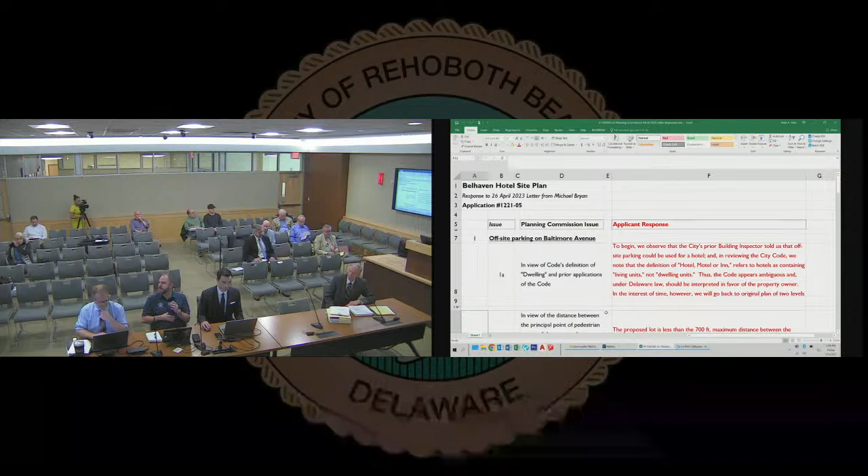Very excited to be here today to clarify and present the design in response to the comments that we've received. On the board here is a synopsis of the issues that were presented in the April 26th letter from Chairperson Bryan to Mr. Papajohn and Mr. Dukes. In particular, they're in order, we numbered them. So I'm just going to, some of these I'll read and some of them I won't, because some of them I have to read, some of them I don't.

In regards to the off-site parking on Baltimore Avenue, the comment was in view of the code's definition of dwelling and prior applications of the code. To begin with, we observed that the city's prior building inspector told the design team and the ownership team that the off-site parking could be used for a hotel. In reviewing the city code, we note that the definition of hotel, motel, or inn refers to hotels containing living units, not dwelling units. Thus the code appears ambiguous, and under Delaware law should be interpreted in favor of the property owner. However, in the interest of time, we will go back to the original plan, and we're going to provide all our parking on site, showing two levels of parking. Actually, it's a level and a half. Let me add that I'm going to go through these bullet points, and then I'm going to show you the drawings, so it'll be a complete presentation, and we can talk about it afterwards.

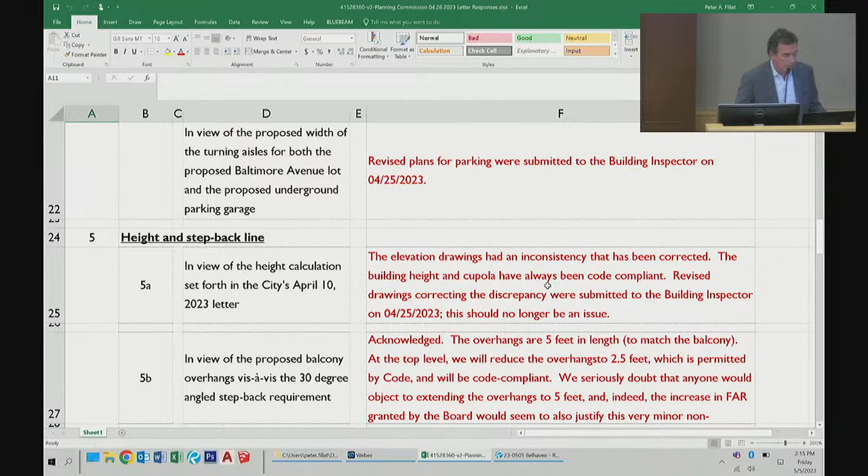In view of the proposed balcony overhangs vis-a-vis the 30-degree angled step-back requirement: the canopies are not buildings, and it was our hope that we would not have to include them in this step-back requirement. We would like to have a conversation about that, as it is not a written item in the code. However, if needed, the plans will show that along the boardwalk we plan to reduce the overhangs to 2.5 feet from 5 feet.

That will fall within the 30-degree requirement. Along Wilmington Avenue, we would take the awnings off if it's the prerogative of the building inspector and this commission. We'll show you what both of those options look like. You guys can decide. There is some level of ambiguity here, but if required, we'll do it. No problem.

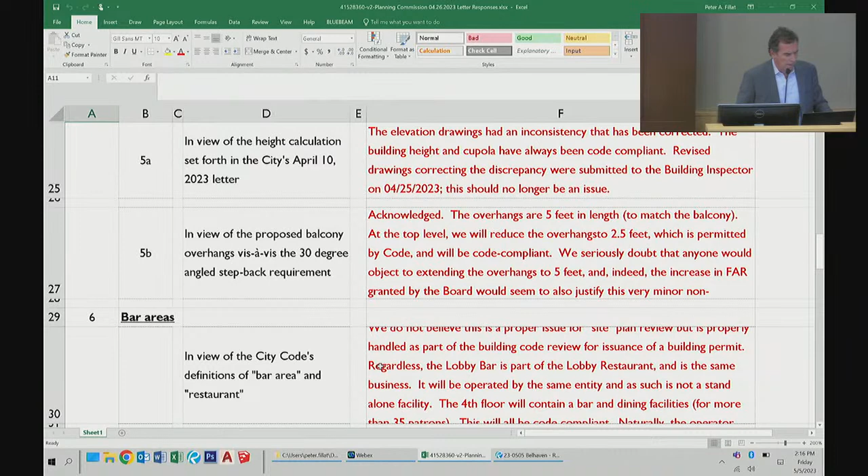Bar areas. In view of the city code's definition of bar area and restaurant, we do not believe this is a proper site plan review item, but is properly handled as part of the building code review, for instance, for issuance of the building permit.

Regardless, the lobby bar is part of the lobby restaurant and is the same business. It will be operated by the same entity, and as such, it is not a standalone facility. The fourth floor bar will serve food and has a greater seating capacity than 35 people.

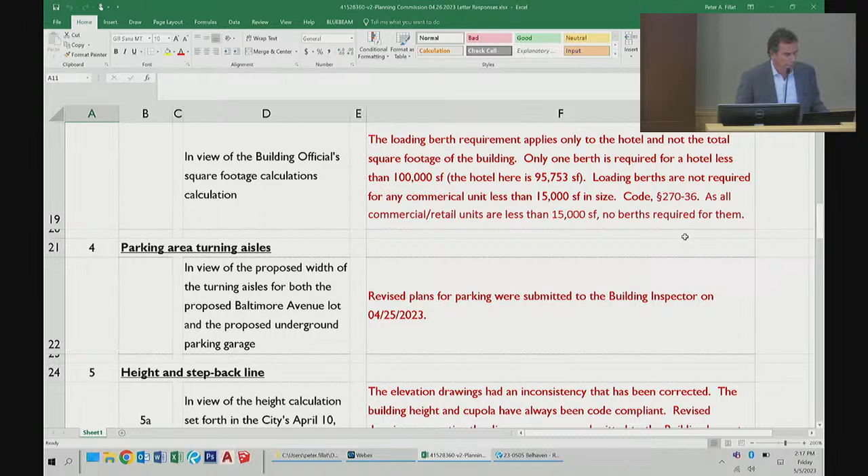Lot coverage: whether the applicant contends that the applicable restrictions under City Code 270-21C with regard to the ground level of the proposed building structure is 50% of the lot area and 100% of the net lot area, or some other calculation, and in each instance, the basis of the applicant's contention.

The building is a commercial mixed-use building containing retail shops and a full-service luxury hotel. The allowable lot area coverage is 100% for commercial use, and the hotel portion is less than 50% coverage. The square footage of the ground floor of the hotel is less than 50%, so this complies.

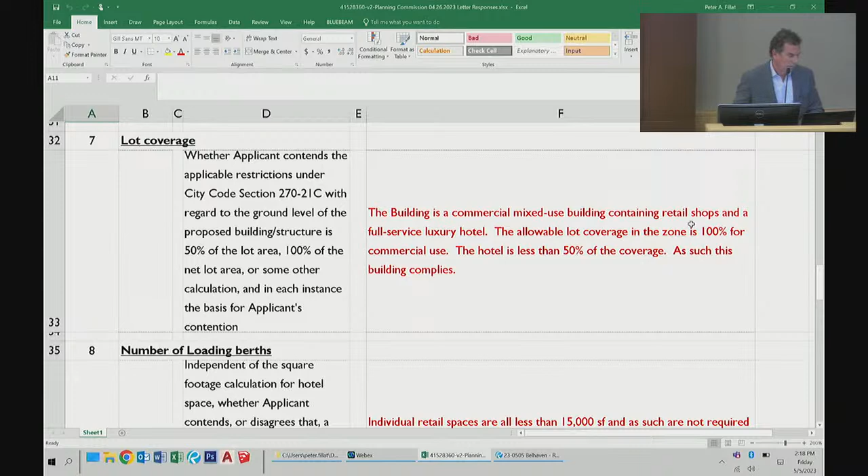Number of loading berths, independent of the square footage calculation for hotel space: whether the applicant contends or disagrees that a loading berth is required solely based on the square footage of the proposed retail space on the ground level. Retail spaces are less than 15,000 square feet, and as such are not required to have loading bays.

Coastal building line. Am I skipping anything? I know I'm bouncing around. I apologize, it's a little squirrely.

Coastal building line: does the applicant intend to obtain a letter of approval from DNREC Shoreline and Waterway Management Section, and if so, when? Yes, the applicant will comply with all other applicable legal requirements.

Cupola. What is the intended use and purpose of the proposed cupola? The cupola is a decorative feature meant to recall the iconic green hip roof of the historic Belhaven Hotel, which was located on this site from 1898 to 1964. It is, in a way, one of the defining elements of this design, and it's something we feel very proud to be a part of and proposing in this solution. It is a nod to a sense of continuity in the Rehoboth landscape.

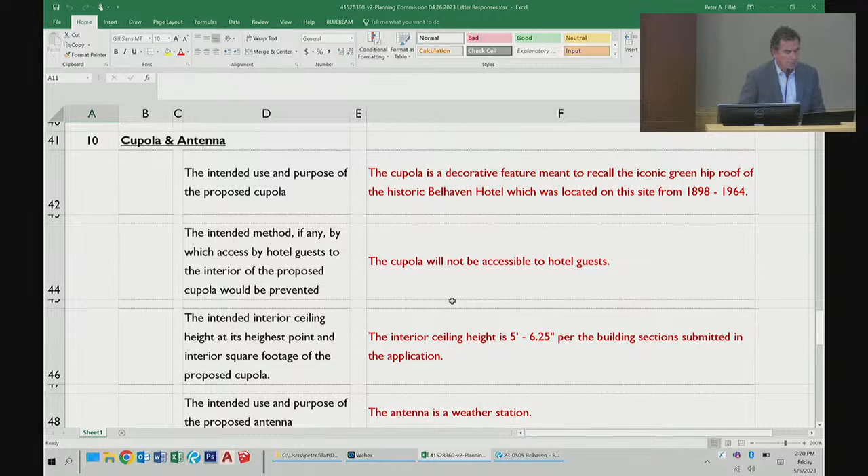The intended use and purpose of the proposed antenna: the antenna is a weather station.

Lot consolidation. When does the applicant intend to formally consolidate the various lots of the code? Lot consolidation will occur concurrently with the final site plan approval.

ADA compliance. There were comments on the ADA space locations in regards to where the elevators are, in view of the distance of the proposed spaces number 6, 7, 11, and 12 from the proposed elevator bank in the proposed underground parking garage. These spaces, we've redesigned the garage, and we'll show you that in a minute. It's per the plans that were submitted 4-25-23 to the building inspector.

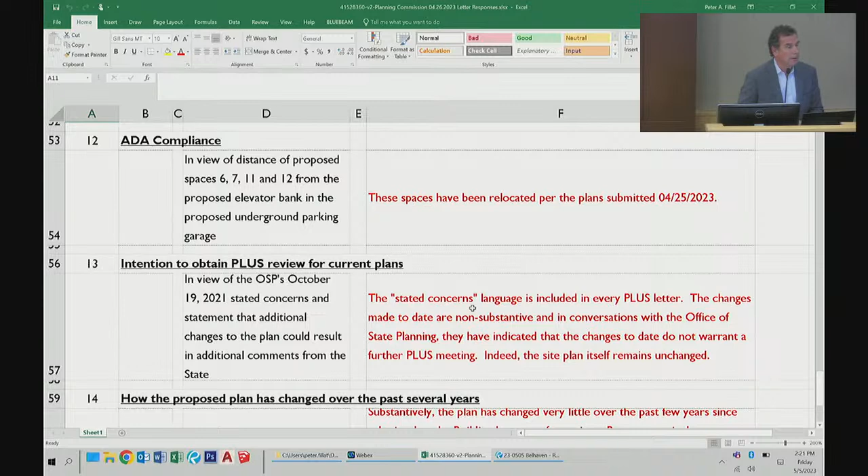The intention to obtain PLUS review for current plans. The comment is, in view of the Office of State Planning's October 19th, 2021 stated concerns and statement that additional changes to the plan could result in additional comments from the state. The quote-unquote 'stated concerns' language is included in every PLUS letter. The changes made to date are non-substantive, and in conversations with the Office of State Planning, they've indicated that the changes to date do not warrant a further PLUS meeting. Indeed, the site plan itself remains unchanged.

And then lastly, how the proposed plan has changed over the past several years. Substantively, the plan has not changed very much since the building was originally submitted in 2019. The room count is the same. Commercial and retail space is virtually the same. The only real change is that the second level pool, when originally presented, was along Wilmington Avenue. We moved that pool to the middle of the building where there's a courtyard, and we've moved the guest rooms to the south wall.

So now I'd like to just go through the drawings, which is always more fun.

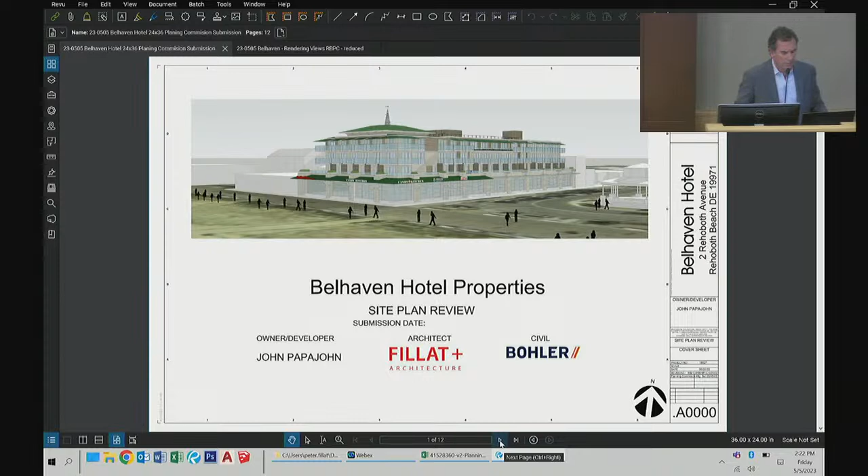This set of drawings has been revised to acknowledge today's date, so it's dated 5/5. This supersedes all the other stuff that we just recently submitted. Yeah, this is it, right?

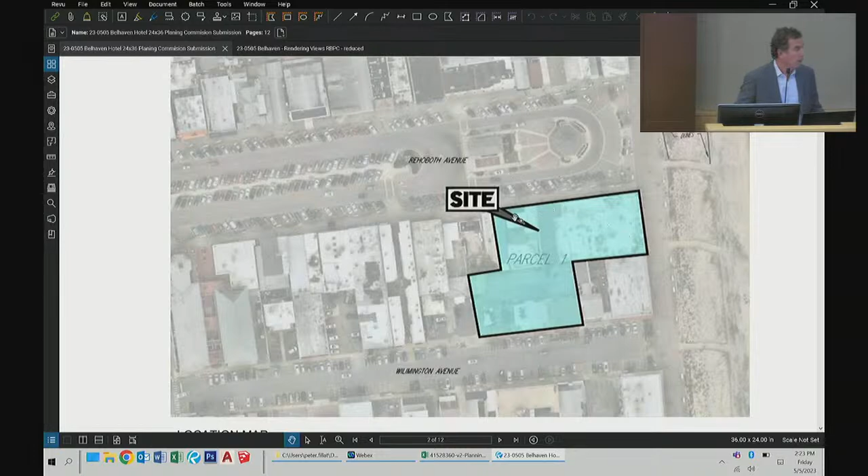So you'll see on this plan in particular, in this drawing right here, there is no location of the Baltimore Avenue lot. This is the site, the entire site. And in this plan, we also respond to various aspects of the points that were discussed earlier.

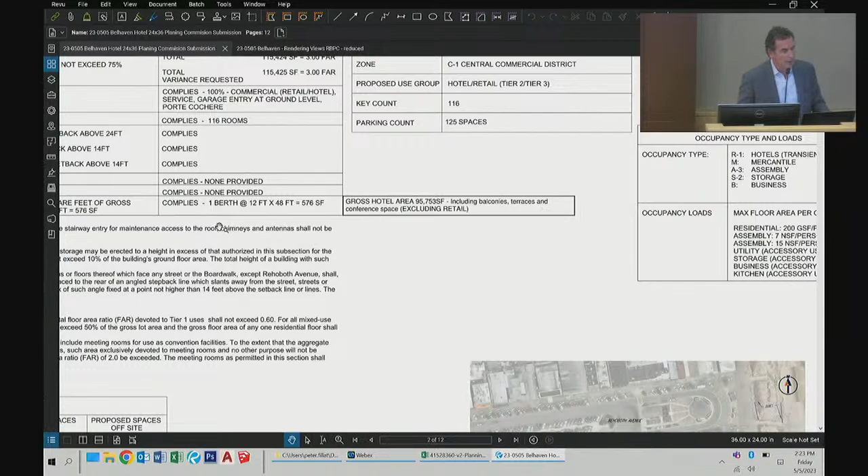The gross area of the hotel is 95,753 square feet, including balconies, terrace, and conference space, excluding the retail. The requirement there is 1 berth for loading. In terms of the parking requirement, it's the same at 121 spaces, but there will be a Belhaven garage underground. It'll all be there, 125 spaces.

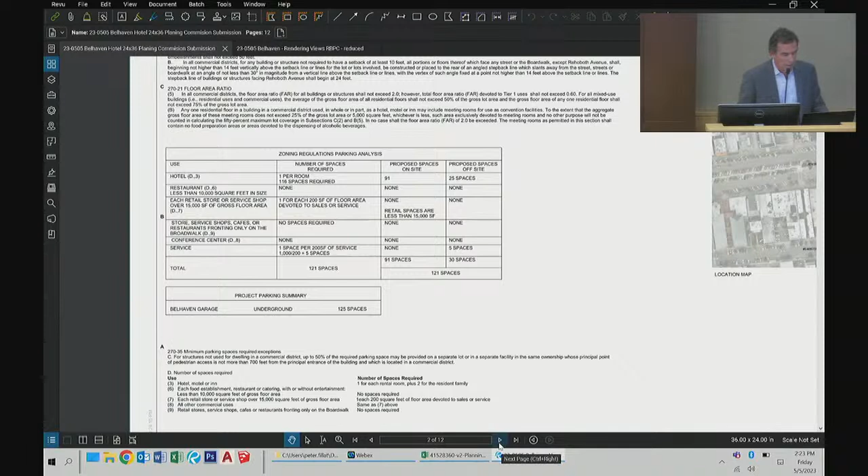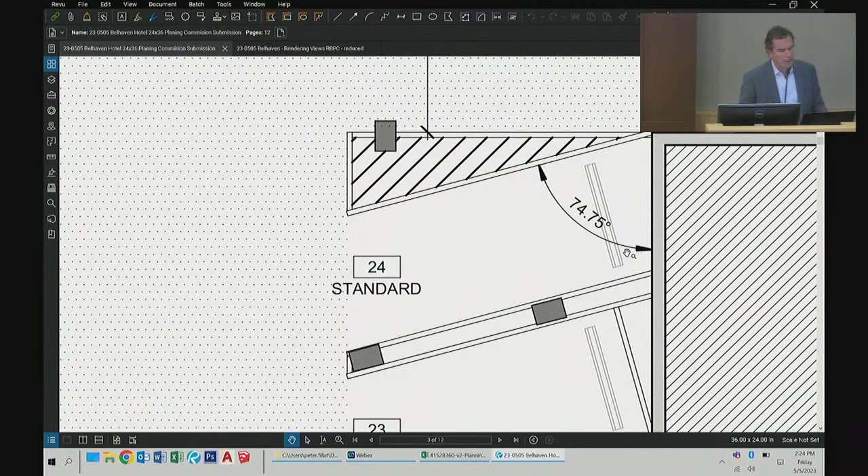So I'm going to go through the drawings here - this is fairly technical, but if you look here, all of the drive aisles form a one-way system with a 20-foot wide drive aisle, and the parking spaces are 74.75 degree spaces.

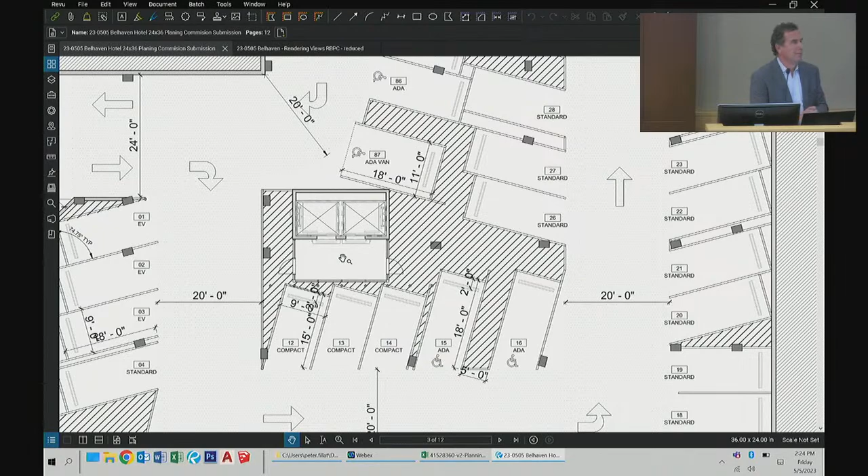In particular, in response to the comments regarding the ADA spaces, these are the ADA spaces here, the ADA van spaces there, another ADA space there, all of which are connected to the lobby of the hotel. We want to get this thing done, so we're responding positively to the comments that were received. This also shows that the ramp comes down here.

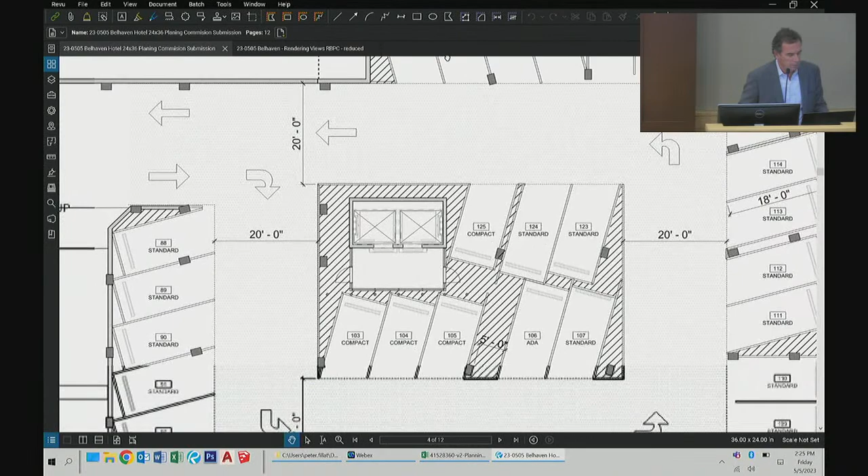The ramp continues down to the lower level of parking, which contains - let's see how many spaces it says - I think it's 25 spaces below grade, but I'm sorry, it's actually 35 spaces below grade. We are now at 125 total, and the requirement is 121, so we have 4 extra spaces.

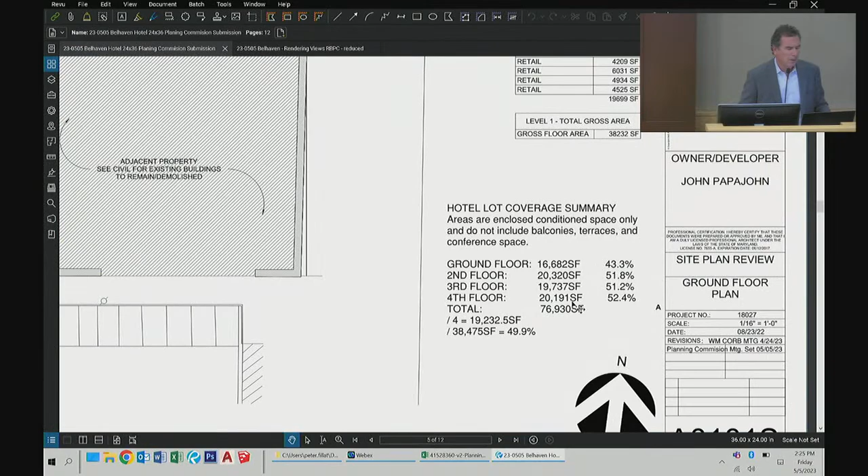There's really no major change to this. Again, we still have only one loading dock. Everything about this plan is pretty much the same. There's an area summary here that addresses some of the issues of lot coverage, even though we've kind of covered them already, but they're just there for reference.

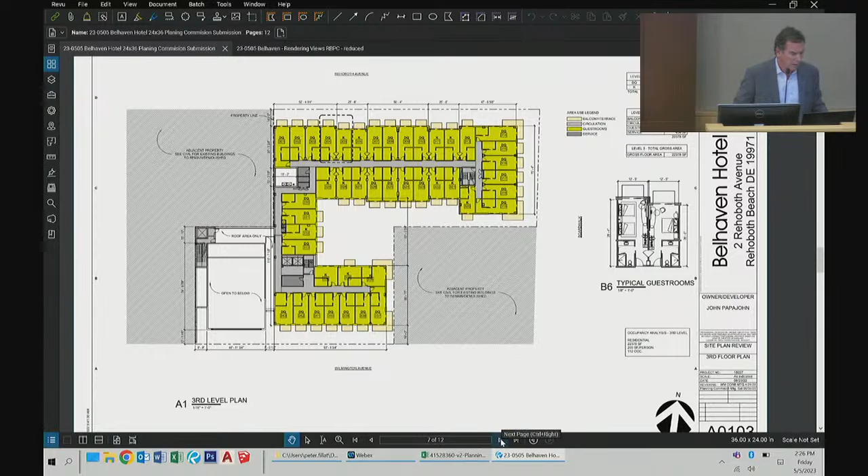No substantial change to the third level plan. The only change on the fourth level plan is that because of the setback requirement along Wilmington Avenue, these balconies along Wilmington will be 3.5 feet deep as opposed to 5 feet deep.

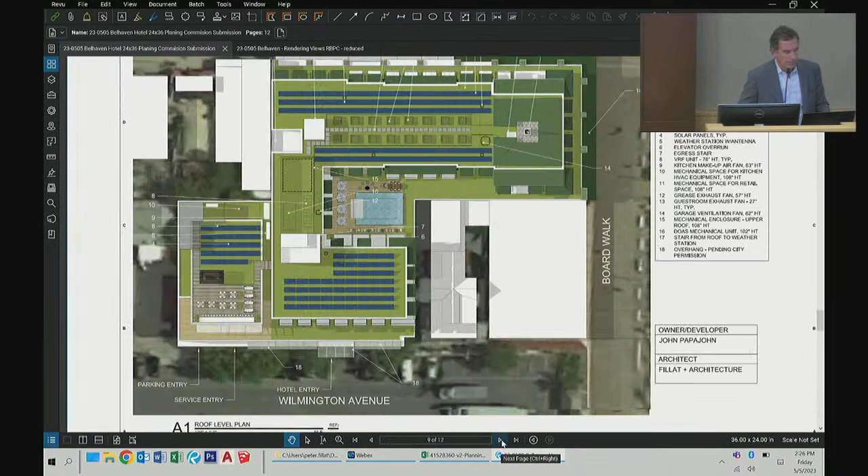Building is similar, roof is very similar, okay? So in particular, this is the kind of thing I want to talk about, and I'm hoping that my fellow architect will be able to help me here.

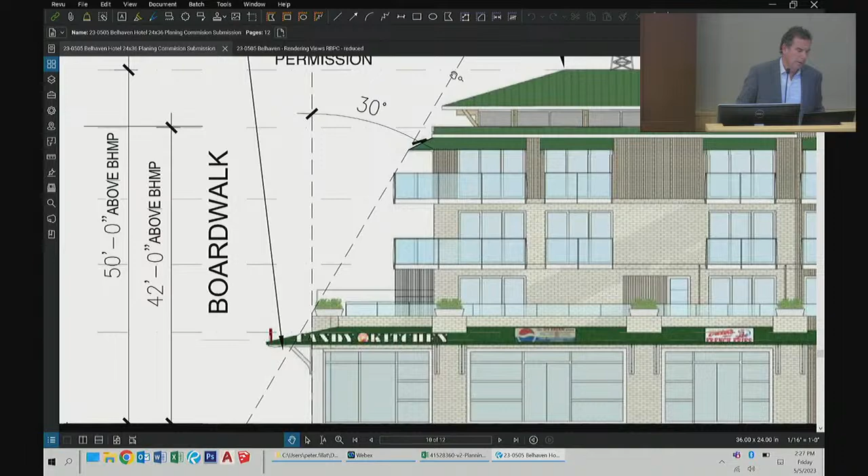What we've done here is we've really just shortened this portion of the awning to stay within the 30-degree setback here. Everything else on this elevation complies.

We also have changed the note so that it says 50 feet above the BHMP, which is the building height measuring point, so there's no question as to what's 50 feet and what's not.

Building height measuring point is elevation 13.42. The ground floor of the building is elevation 13. I'm sorry, what was that number? Elevation 13.

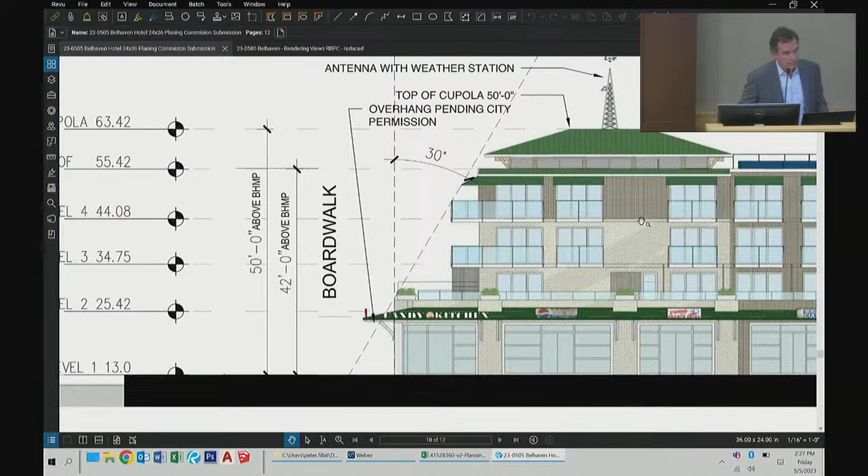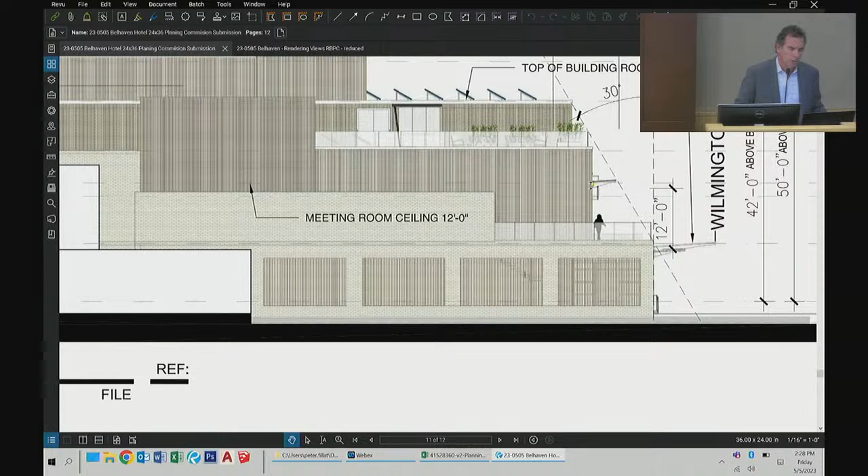No major change to this elevation. This is really the elevation that shows where we have lowered the awning canopy in front of the ballroom, so it's a little shorter. We've eliminated the canopy facing Wilmington Avenue.

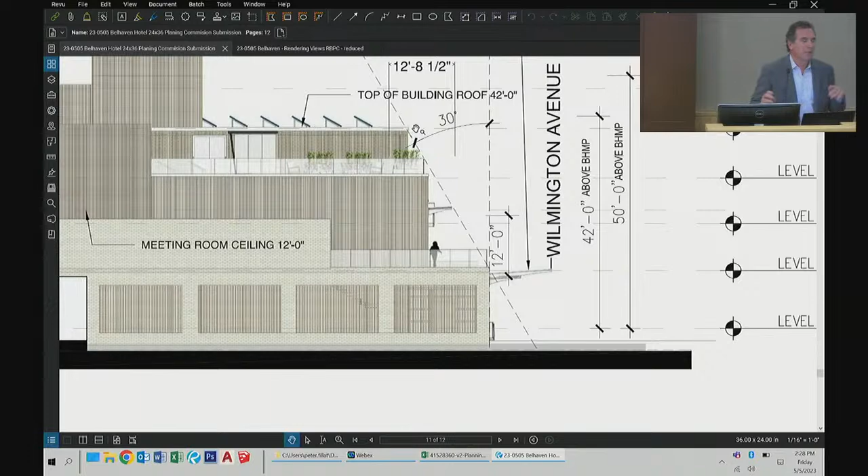This awning is also an important part of the sustainability goals of the project. One of the best things about this building when we modeled it was that all of the windows were covered by either a balcony or an awning. If we have to live with this somewhat ambiguous requirement, we'll lose that coverage on this side, the south side of the building, unfortunately, as life would go. That's why we want to talk about it here today, because perhaps there's an opportunity to find another way. We're not going to reduce the size of the building, and everything else stays the same.

So here again, you can see it. This is the same section that shows the 30-degree setback. This is actually the other side. Wilmington Avenue is on the right here, and the building is looking to the west, as opposed to the elevation which was looking to the east.

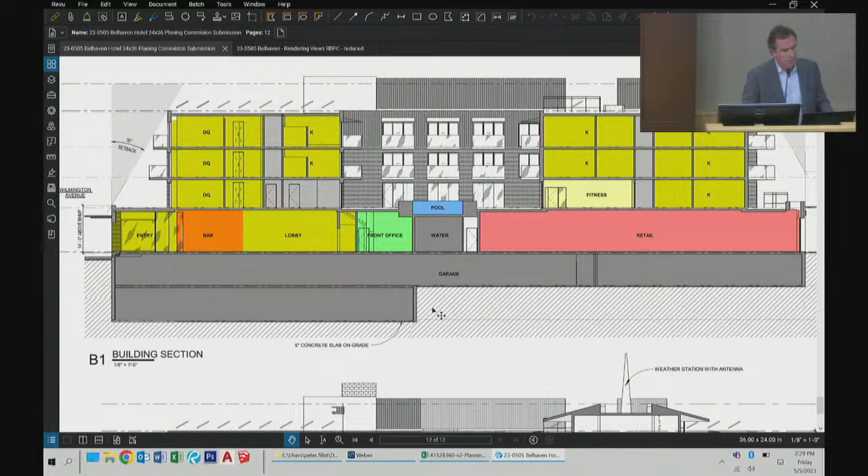This also shows you how the second level of parking works, a partial level, as you can see here. So that's the design. On the other side, you can see the full 5-foot awnings fall within the 30-degree setback. We like the aesthetic of it, and we also like the energy savings aspects of it.

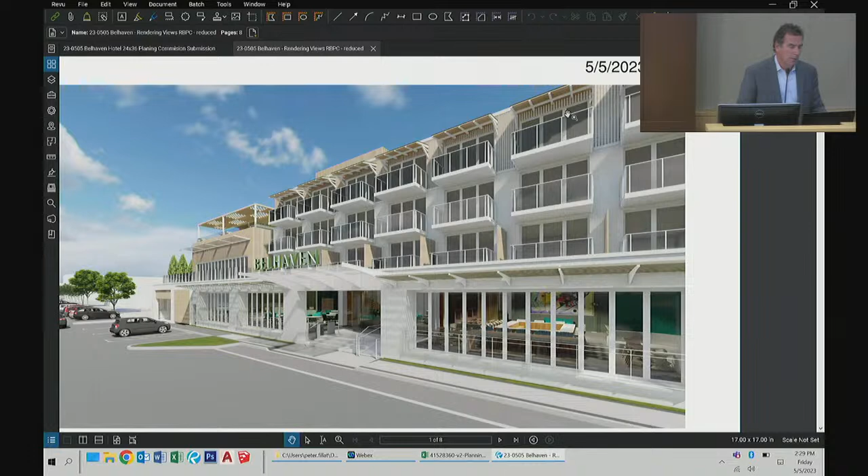Lastly, I would be remiss not to really plead my case here. This is the design as we presented last month with the awnings facing south. These really add character. And this is what the building will look like without those items. It's just a stark contrast between one and the other.

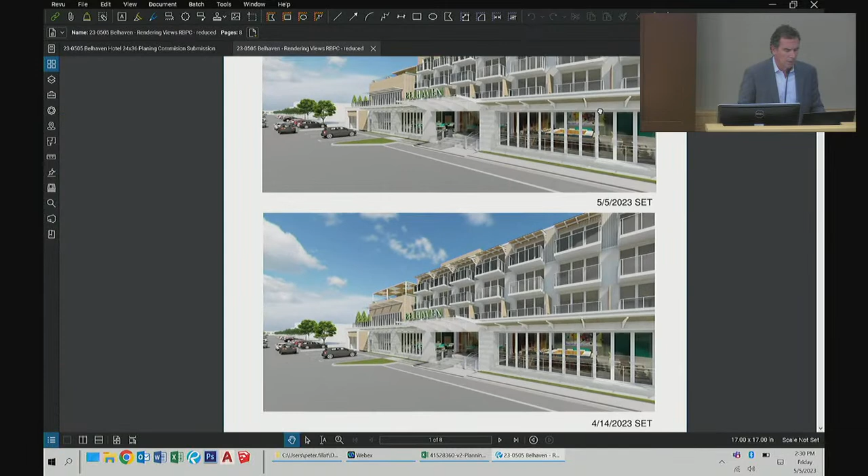It's easy to see on this elevation the most. I'll show you the rest of it, so you'll say it doesn't make a difference over there, but it does make a difference here.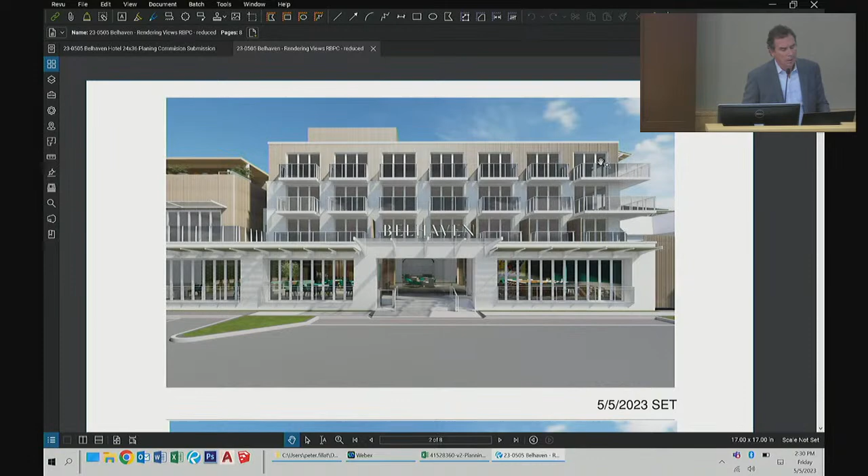So here, this is the south elevation. Again, the awnings and the canopy over the rooftop bar cafe. And this is what it would look like without it. You can sort of see it's a little more barren looking, and obviously the heat gain would be substantially greater on these upper level units than they would be here. As a matter of fact, you can see the shadows here, how beautiful that is, versus not there.

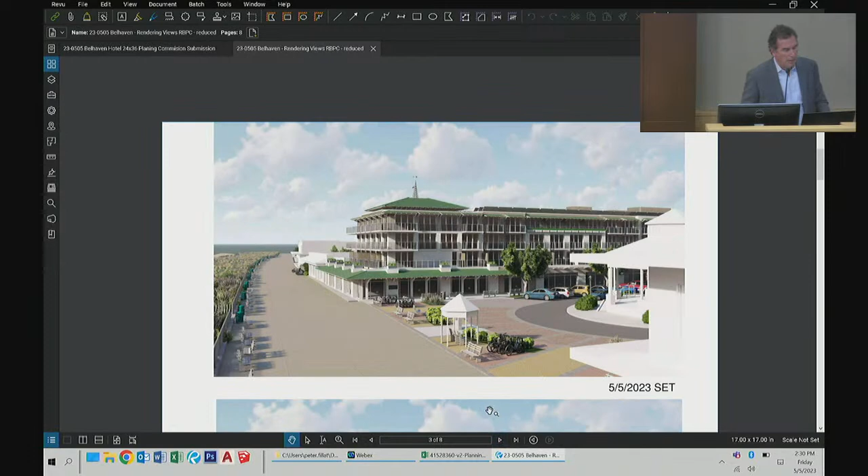On the other sides of the building, it's not quite as apparent. We are going to still keep these because we think it's a defining character. This is the 2.5-foot awning here, and this is the 5-foot awning there. Not quite as elegant, not quite as interesting, but it's still something we would like to keep, and we'll be able to keep.

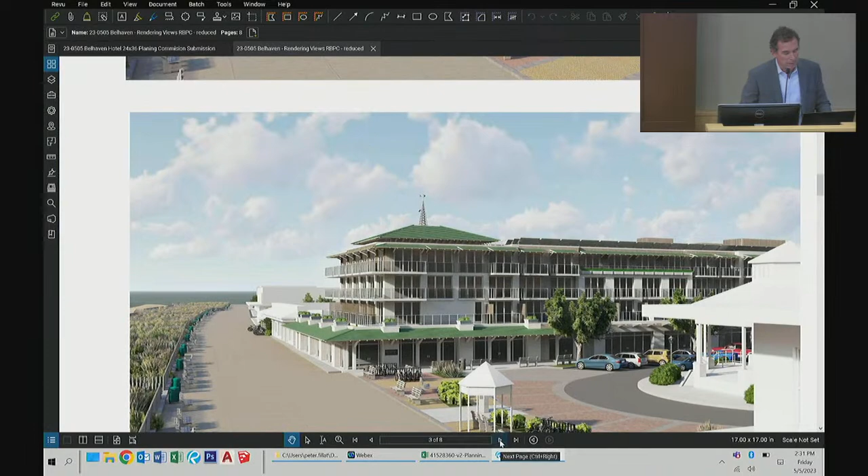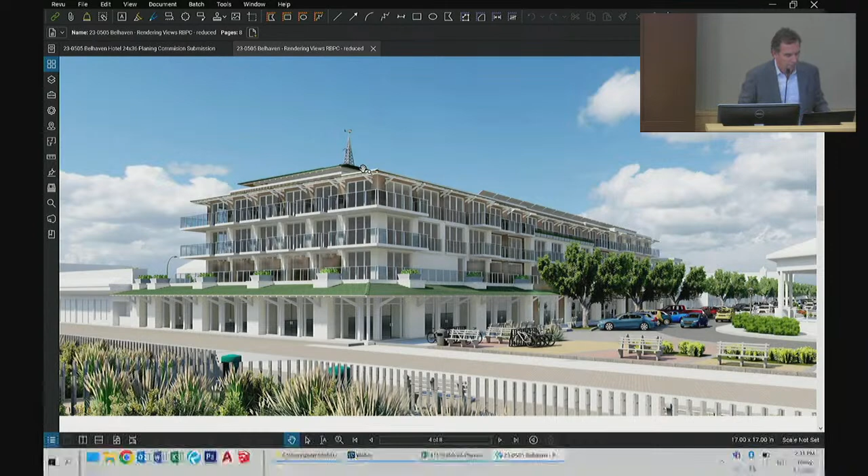This is another one, the full 5-foot awning along the boardwalk, and you can see it's sort of consistent down the entire building. And then here it is, a little different. Like I said, my colleague the architect will be able to have a stronger sense of this than perhaps most lay people.

Okay, here's a view from the top. This is the shorter awning. This is the larger awning.

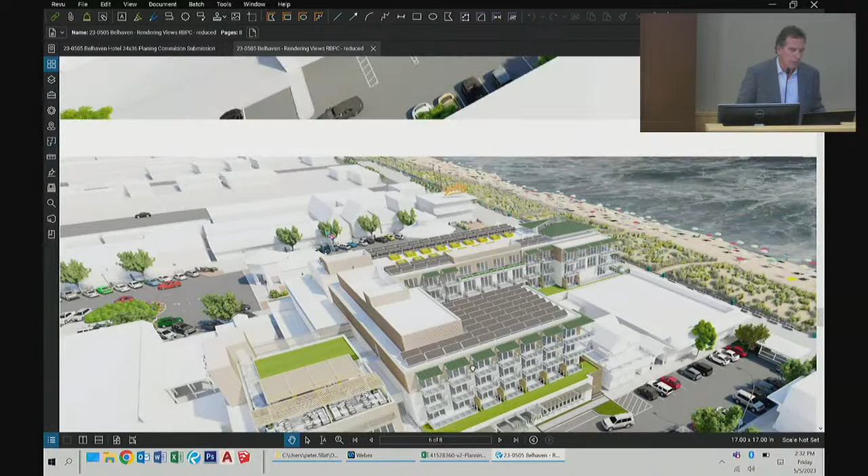This is a view as presented at last month's hearing, with the awnings facing the south elevation and the shade device over the rooftop bar cafe. And here's what it would look like if it had to be eliminated.

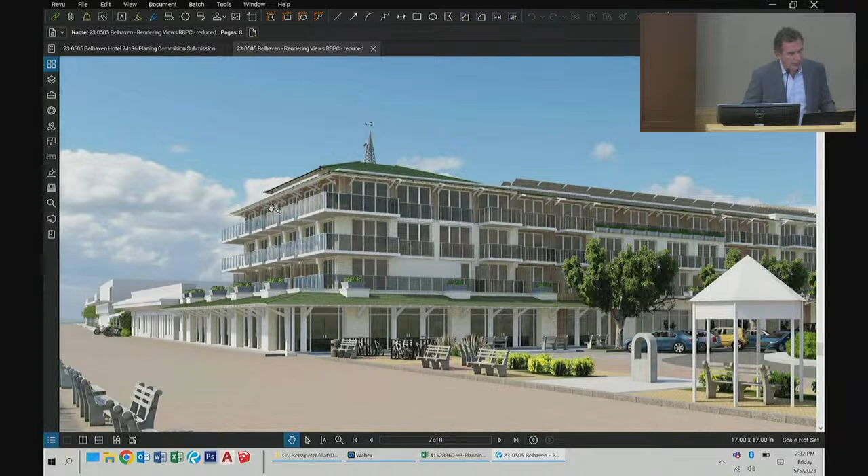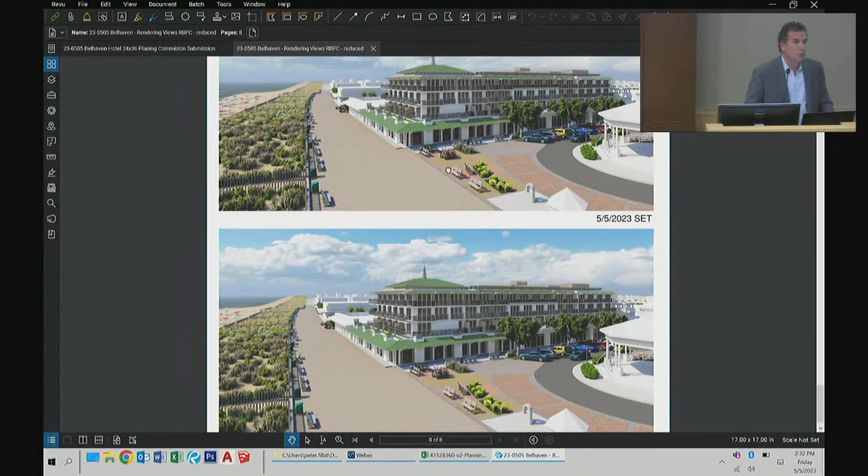Again, a couple more beautiful views of our project, which we're super excited about. This is the 2.5-foot awning along the water's edge, and this is the more proportionally elegant solution with the 5-foot awning. And lastly, this is the 2.5-foot awning. So that concludes my presentation, and I'm happy to answer any questions and follow up with any conversations you'd like to have.

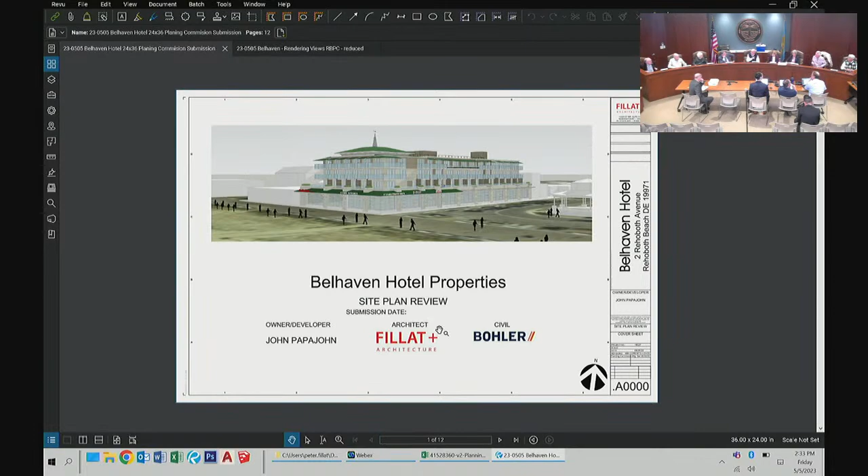If I may interrupt, sir. I'd like to go back to the building inspector for just a moment. Nick, in view of what has been discussed here today about putting a second, partial underground parking floor, maybe Strawn Environmental, the sub-consultant, should be advised of that before they put more work into a building that only has one floor underground, and before they issue their report. Did you ask that to the building inspector? I'm asking that to him, because he's in touch with the sub-consultant. I'm sorry, the planner, sorry. Thank you, the planner.

Yes, so the consultant would absolutely like to have this additional information. However, I think we're still going to be looking for a level of detail regarding the flood-proofing design elements they propose, as well as discussion and analysis of the hydrostatic forces. In review of the previous geotechnical report, which we appreciate you providing, it does not address the actual analysis of the subsurface water forces at play here. It mentions them in passing, but does not say more than that. So it gives us a starting point, but we can't make any definitive analysis until we have the whole of the information available to us.

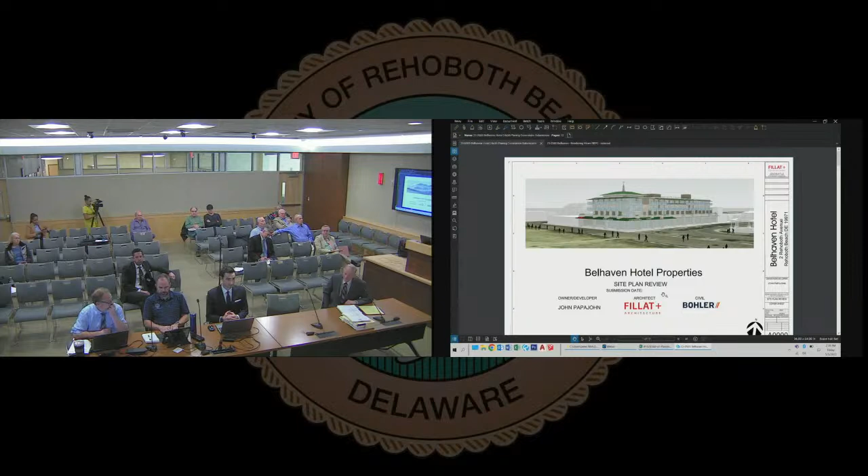Very good, thank you. Mr. Fillat, anything else? No, thank you. Members of the commission? Mr. Strange? Couple of simple questions. Speak into your microphone. Oh, I'm sorry.

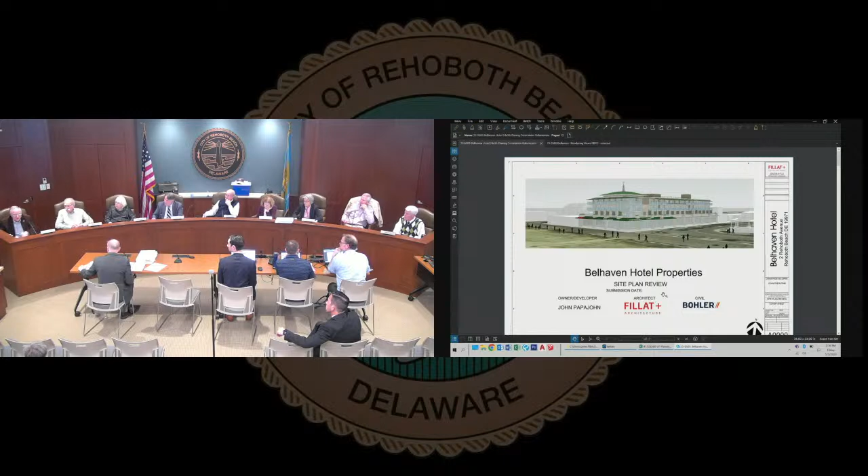Precisely. The other is just a question. In the documents you provided, there was a reference to an alternative design approved on 4/17/2023 by the State Fire Marshal. There was nothing in your packet that included what that is, I guess is what I'm asking. Is that this, is it this design? Yes. Okay, so we're going to be getting that with engineering size drawings eventually. This design here? Well, yeah. Yes, okay, sure, and that's the one this is referring to, that was submitted to them. Correct. Okay.

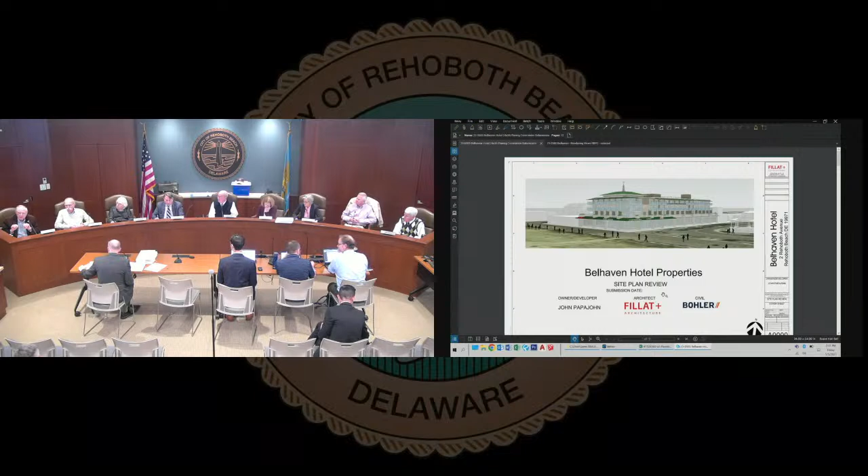Forgive me, I'm not sure I'm being clear even for myself. That design as such was approved by the state fire marshal, and therefore his comments or recommendations are in a report that will be available to us, or was that even available to you yet? I believe we got a letter from him. We didn't get a report. So we got a letter that said this is approved as per the communications and submission. Okay, because in a state fire marshal's approval, somewhere in there will be statements such as the maximum capacity of the building is X, and the maximum capacity of particular rooms are Y. I can show you the state fire marshal letter if you'd like to see it. Well, eventually it needs to be part of the record, so I'm asking, because it wasn't in the original package, and that's one of the things needed to do our due diligence when we finally move to the next phase. So that was that.

Well, since the Baltimore Street issue is off, I have no further questions with regard to that. And I guess what I would say is now with this new information, which thank you for providing it today, we'll need either D or E size drawings that you had before so we can actually see them and make determinations of what it is. Appreciate it. Thank you.

Yes, sir. Ms. Gay? Yeah, I have a couple questions about lot coverage. Thank you for the presentation, that was very helpful. And I saw on the materials we did get that you had recalculated the lot coverage for every floor. I guess I just wonder what the recalculation consists of, since you're now maintaining it does meet the requirement for 50%. That is what you're maintaining, right? That you recalculated the numbers from what we had before, but I couldn't tell what was included and not included in that recalculation. For example, the first floor, you now have as 16,682, when by my calculations is 18,534. I just couldn't tell what was left out.

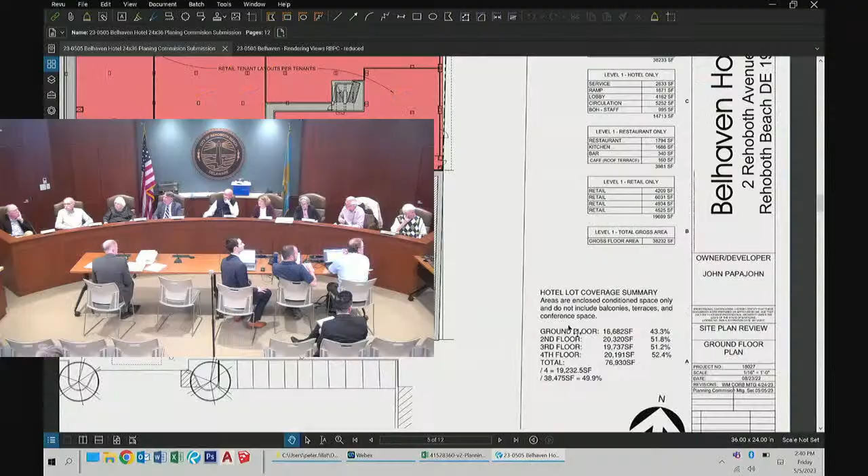Yeah, so in this diagram here, it says hotel lot coverage summary. Yep, I'm looking at that. Areas are enclosed conditioned space only and do not include balconies, terraces, and conference space. So in these numbers here, the total that is 76,930, they do not include the balconies, terraces, and conference. So you maintain that lot coverage does not include a balcony? So if it were per the previous code, it would not be included. So, and irrespective of this, the variance allows for greater lot coverage.

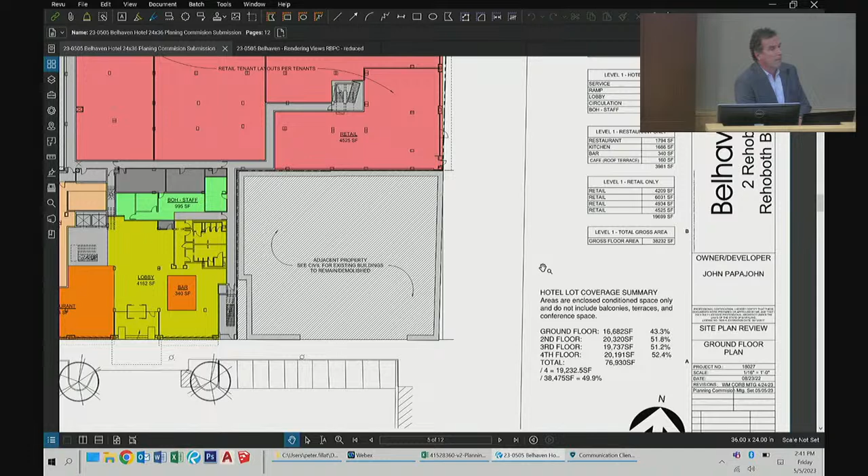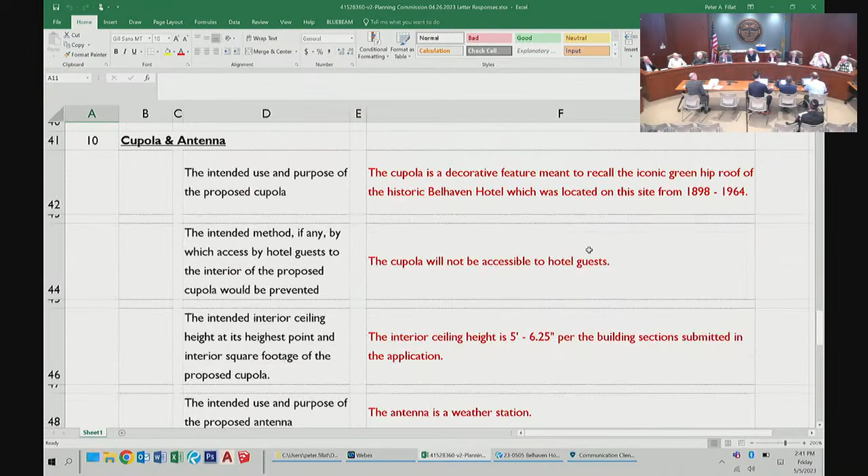Well, by its, I saw that you were making both arguments, but I also saw that you redid the calculations to meet the 50% requirement. So I guess what I was trying to demonstrate to the building inspector is that there could be a dialogue here that would bridge this gap, even though it's not necessary. Okay. And you didn't seek lot coverage variance when you got the FAR variance, is that correct? You did? Yes, we did. We did. So you specifically sought a variance from 270 - Matt, help me out with the number - the part that covers hotel lot coverage is a separate code feature from the FAR feature. You sought a variance for both of those codes? Yes, we did. Okay, I'll look at that. Okay, thank you.

Okay, Susan Stewart, do you have any issues? I have a question with regard to loading berth. Yep, and it's similar to Susan's. You're saying that the hotel area is 95,753. Right. If I take your total square footage and subtract that out, I get 19,000 something. What are the elements that are in that, the difference between 115,000 and change and 95,000 and change?

The retail space. The retail space. So when you say that you don't need a loading berth for the retail space because it's less than 15,000 square feet, how do you reconcile that? Because each of the retail spaces are less than 15,000 square feet. Okay, because the code talks about uses, not spaces. So your position is that each shop is its own retail space? Yeah.

And if you had to put in another loading berth, where would it go? Next to the one that's on Wilmington Avenue. Okay. Mr. Fillat, can you get your microphone closer? I'm sorry, next to the one that's on Wilmington Avenue.

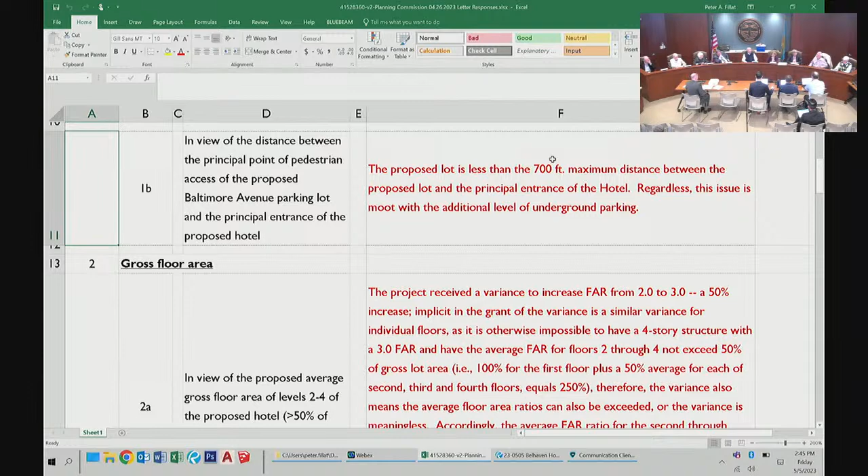Mr. Chairman, if I may, since we're here and it's in people's mind, my name is Richard Forston, one of the attorneys for the applicant. I tabbed that provision about loading berths because I anticipated it might become an issue.

The code says a retail or service establishment or other commercial use with over 15,000 square feet of gross floor area requires a loading berth. In other words, if I've got a store and it's 15,000 square feet or more, I need a loading berth according to your code. But if I have a series of 2,000, 3,000, 4,000 square foot commercial uses that are all separate in a row, like the boardwalk, I don't need a loading berth. And by the way, where would I put it? Ideally a loading berth goes for a particular store, so I'd have one loading berth for what, the 4,000 square foot store, and the rest wouldn't have them. It doesn't make sense. And in fact, that's why your code uses the singular and says a retail establishment greater than 15,000 square feet needs a loading berth.

It's a such and such a size, you're going to need a loading berth because you have a lot of deliveries. But if you're a small store or a series of small stores, you don't need a loading berth. So that, we cited that, it's 270-36. We're going to follow up, and I know this is new to you, but as you can imagine, we've spent the last 2 or 3 weeks going through all the comments we had gotten from you previously.

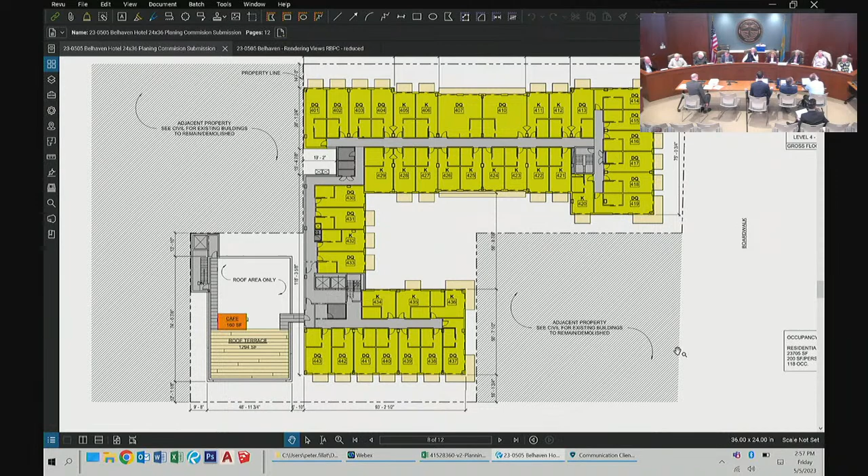The restrooms are located here, connected via a bridge. So those are public restrooms right there? Yes, they are. Didn't know that, I just — public restrooms right there. I doubt this would satisfy what you've had there, which is just simply a bar, pretty much self-standing.

I'm sorry, but to me, I don't see how this works and meets the code. It does work. It can work. It will work. Well, I don't see it. Can we go to the first floor?

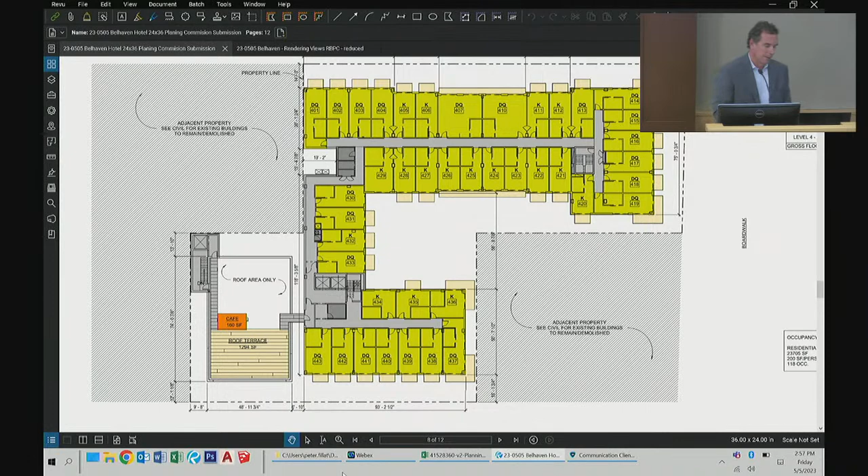This also has not changed, at least since the August plans last year. I realize what you're trying to indicate — you have a restaurant, a separate bar, and the lobby, and you say that's all one combined space, therefore it meets code. But if you really look carefully at what the code requires, at the very least the bar has to be part of the restaurant, and I believe you'd have to have a separate entrance to the hotel reception area. So once again, I don't personally see that this meets the code.

So the code does not say the bar has to be contiguous? What you're really saying is the bar needs to be contiguous to the restaurant, and if the orange square in the middle of the yellow were touching the orange where the restaurant is, presumably you'd be fine with it. What's troubling you is that it's not contiguous to each other — if I can drill down to the nub of your concern. Well, the code says the bar area has to be within or in the restaurant. All right, but if I say that bar area is part of the restaurant and people are going to eat food there as well, is it in the restaurant or not? It's not contiguous, right? So that's your point, right?

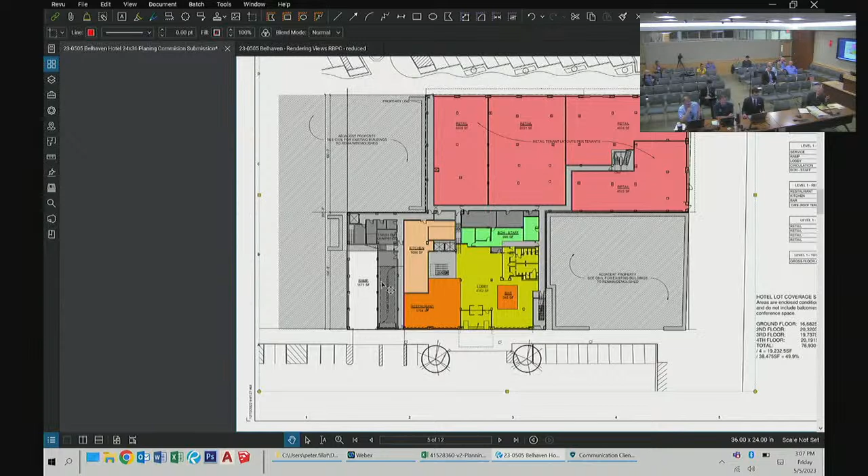I have a question about something I didn't notice until now. With all the focus on loading berths, I happened to look behind it to see that trash room and dumpster. I've always wondered how that's going to be accessed if it's inside. But I now see it's separated from the loading berth by what appear to be stairs and a ramp.

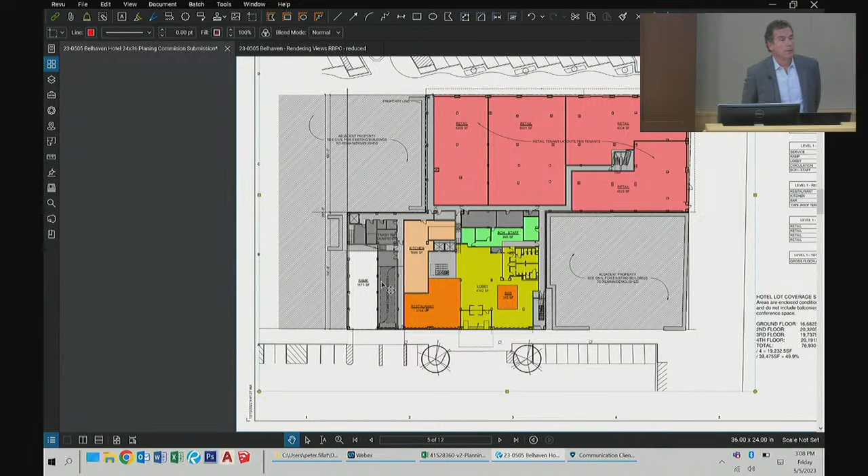So it'll either be rolled out, or a truck will go in there and get it. It would be able to be accessible. This is not an unusual situation—it's a refrigerated room so the trash doesn't smell in the summertime, and it's got a drain in it, so it's easily cleaned. This is a first-class organization here.

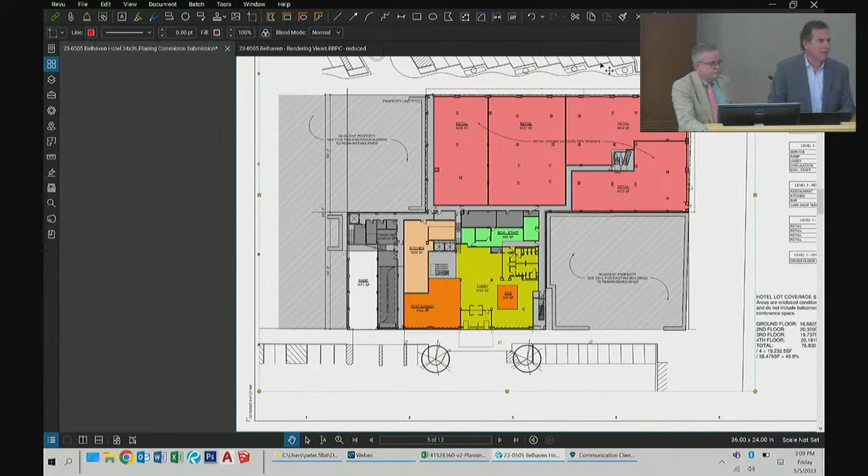So the trash is going to be right next to the front door of the hotel. If you don't think we're going to take care of this... Oh no, I'm not asking that, I'm mistaken, I'm just asking how it is. Either a truck will go in there and front-load and pick it up, or they'll do something—I don't know exactly what. But there's a set of stairs that separates where the truck would be from where the trash is, from where the loading berth is to where the trash is.

That light gray is a corridor. Yeah, but there's stairs there. There's steps—no, those are stairs, that's the egress stair from up above, coming down from up above. So there's no stair right there—well, there's a stair, but it goes up. It's either the ramp, or this is actually a loading dock here.

What happens is that this area is a little lower because the whole elevation of this building is at 13, and the elevation of Wilmington Avenue is lower. So there's a natural ability to have a natural loading dock height there—it'll be lowered a little bit, so it's perfect. But in any case, that's the way it'll work. So that stair is not what you're thinking. And I do notice there are some other little rooms.

There's like 4 other rooms next to the trash room, but they aren't labeled, though they have doors. Are those just all big, different trash rooms, or what are they? Maybe storage? I'm happy to have a meeting with you and show you the drawings for the whole building.

No, I'm just asking the question. It's like a management office. It could be, I don't know. That's a back office? Yeah, it could be a back office. Okay, that's all I'm asking. One of them's security for sure.

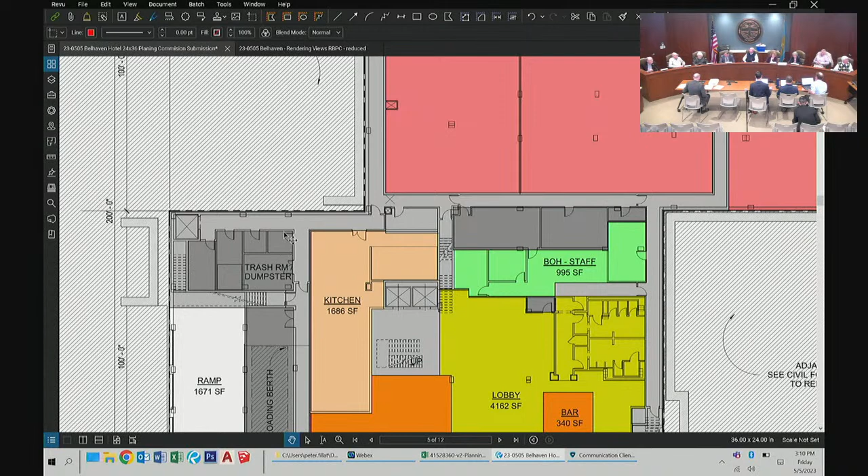The first door to the left is probably security, because everything that comes into the hotel has to be checked in. So there's a window on that door, and that's really kind of the management area. Okay, so all those are just basically little individual back offices. Or one of them might be refrigeration.

Like I said, I could open up the floor. Give me a minute, I'm asking the question on my computer. Okay, that's all I have.

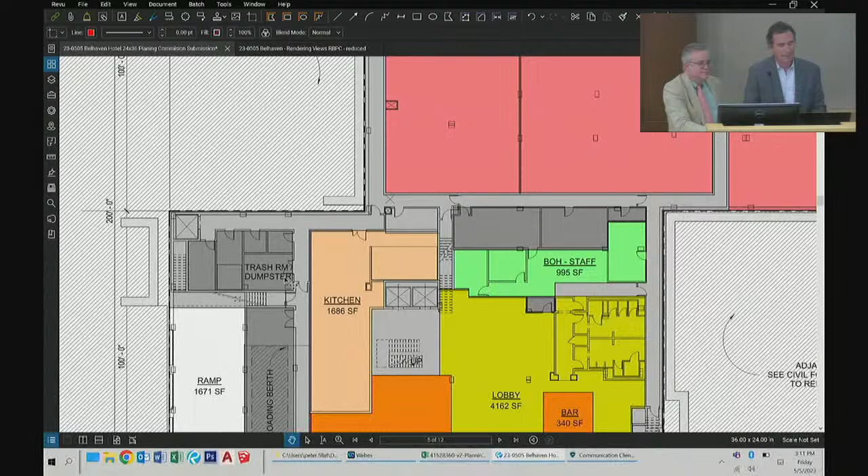Chair, anyone? Mr. Strange, just one comment. The original drawings, and even this one, are an example of where, when something isn't there, you make an assumption. In the previous drawings we had in the large exploded views, there were no access ways or doors showing to any of the retail stores, and I just assumed there was no access to the retail stores.

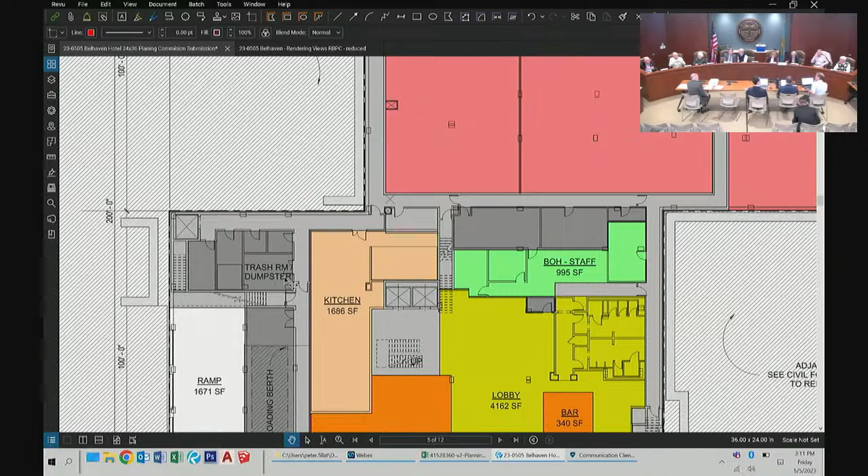Oh no, there will be. Right, but it wasn't on the drawing, and there was no indication of it, so thank you. There are no doors in the front either. If you notice, there's no doors going out to the side.

Well, so we need them to be there. I assumed they'd be there, but so the internals I thought was the same assumption something happens in the rear, and there will be - they also have to have their own bathrooms. I mean, there's a full code requirement for that.

So, this drawing set - the drawing set that we get from when we actually have a public meeting - will be more detailed? No, it'll be the same set right here. Be the same set, okay.

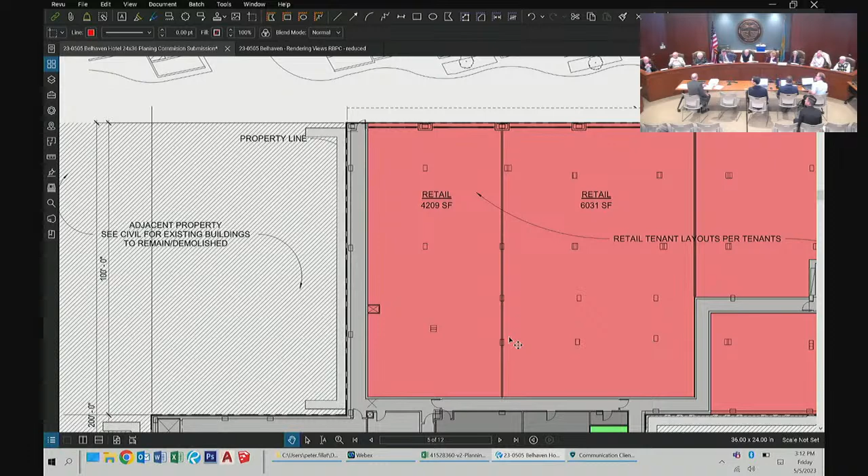And again, the retail space in particular - this is quite common in my experience - you get a site plan approved that shows the retail space, but then when it's time to move in a tenant, that tenant will go to Matt with his own plans: this is how I'm fitting out my space, here's where the bathrooms are, all that sort of stuff. So before you get a CO for any of that retail space, it is going to have to go back in.

Anything else? One more question. With regard to the Plus review, you said in your earlier presentation that it's all up to date because you had a conversation with them and they said no changes needed, or the changes aren't material such that they would affect their prior letter.

Does that include the second level of parking, or was that a discussion had with them as well? It was. Do you have anything that updates their recommendation that tells us that? We will get you a letter from the Office of State Planning. We just haven't had enough time for them to sit down, type it, and get it to us. But we've had the conversation.

From their perspective, looking down with a bird's eye view, the footprint of the building isn't changing, the site plan itself isn't changing. What we do on individual floors really doesn't matter to the Plus folks. But they said they would send a letter confirming this, so we'll have that to you. Thank you, and that's a good question, I appreciate that.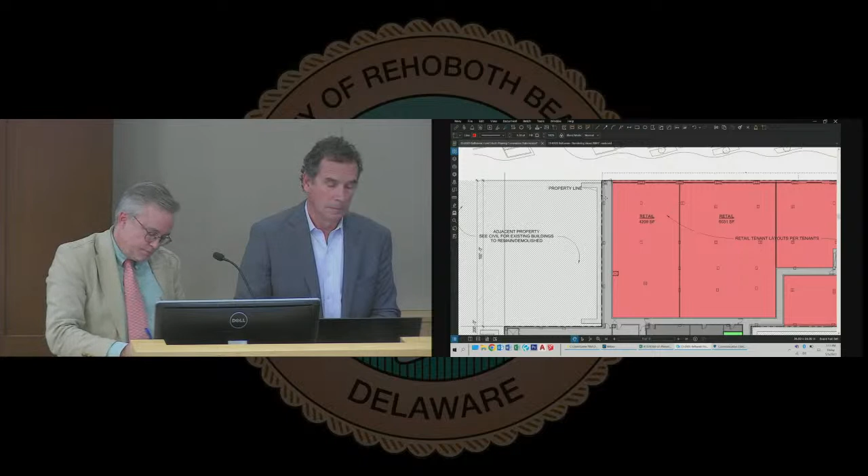Mr. Ellison? Just one comment - I would like to applaud the owners and the team for abandoning the idea of a surface parking lot on Baltimore Avenue, particularly at a time when the city is very much involved in trying to revitalize that street as well as Wilmington. So I applaud that decision. It will give you two an opportunity, hopefully, to do something really wonderful on that other site that will help enliven Baltimore Avenue. So thank you.

Mr. Forston, sir, or to whomever you wish to delegate this: I need to get it straight in my mind about the FAR variance from 2.0 to 3.0, and how that somehow brings in lot coverage and gives you more permission on the lot coverage side. The meeting conducted by the Board of Adjustment was noticed as a request for a variance pursuant to Section 270-21B5 of the code, to get an increased variance by 50% of the FAR, from 2.0 to 3.0. I don't see lot coverage mentioned in that. I'm wondering if perhaps by a supplemental filing you could clarify how an FAR variance somehow gives you more lot coverage variance.

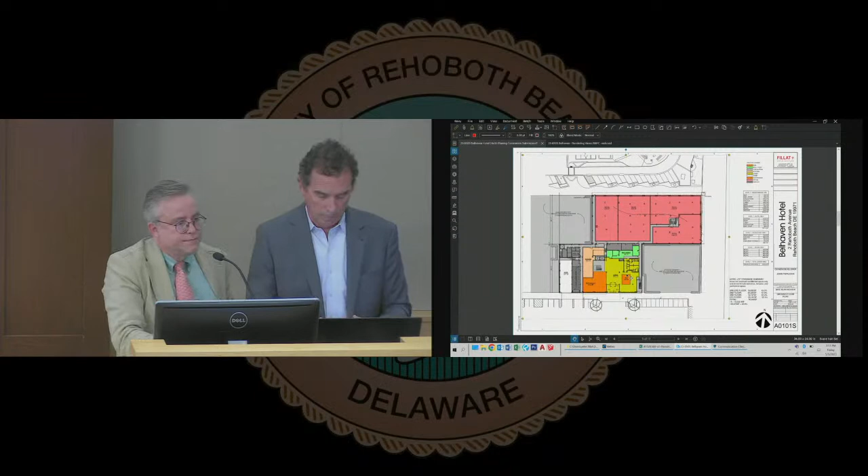270-21C is your lot coverage at ground level. Floor area ratio is the total of all your floor areas to the square footage of the lot itself. I understand that, but a couple of years ago, in a discussion on code clarifications, I specifically asked whether lot coverage was just the surface. I was told by city staff that it was measured from an aerial view of each floor. Was that from Dom? No, that was not Dom. Because he's given us some information here that's contradictory too. No, it was not Dom, it was after he left, actually, but anyway, it's fine.

I'm just saying that you have said the lot coverage on the upper floors does not include balconies. I'm just clarifying that is what you said. So, Mr. Forston, could you give us a supplemental filing that addresses your position on this, please, sir? Absolutely.

Anyone else? All right, I'd like to give an opportunity to the public. If anyone wishes to address the Planning Commission, please limit your comments to three minutes.

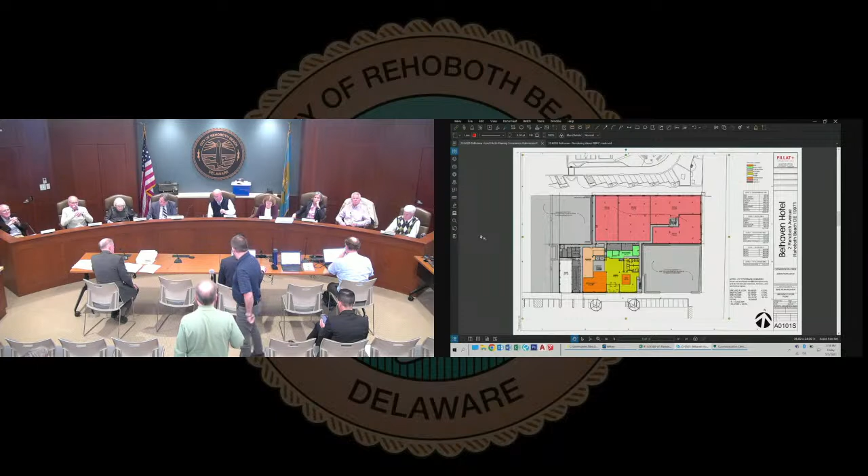Good afternoon, again. I'm Dr. Michael Treos, co-owner of one of the adjacent properties. Peter, this is more directed to you, if I may, and it's real simple. Currently, from what I'm seeing on the plans, the current one-level garage, including the slab and the one-foot freeboard, to the surface level, comes out to 12.7 feet. Am I correct?

No, you're not correct. Okay, from the surface level down to the slab and the freeboard, what's the distance down? Freeboard is one foot, 12 inches, and then you have the slab underneath the freeboard. So the slab is inclusive of the freeboard. Correct. Okay, so the top of the floor is elevation 13, the freeboard is 12. Right, and so we are 12 inches above that freeboard.

That is 12 feet. Elevation 12 is the floodplain requirement. Okay, correct. The design elevation is 12, plus 12 inches of freeboard that's required equals 13 feet. That's our elevation 13. Elevation 13, okay, that's what I was asking. Now, I understand there's going to be a second level. Do you know what the total depth will be down to the slab and freeboard for the second level? The second level, below grade, the slab level at this point is elevation -8.

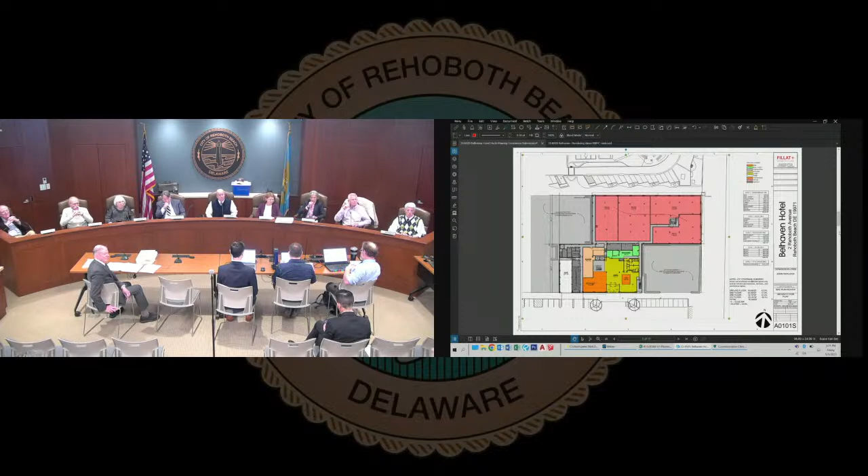No, sir. Anyone else? Yes, ma'am. Hello, everyone. I'm Alison from Go Fish Restaurant, 24 Rehoboth Avenue.

I have a question on this slide, actually. So you have that area where you're going to deliver to the back of these units in blue, and I'm wondering what that is that butts up between my building and that first retail store. Is that a walkway, or can you explain that to me?

Again, Mr. Fillat, you don't have to do this. There may be some type of a merit badge answer, okay, just for the record. I pushed some kind of a button here.

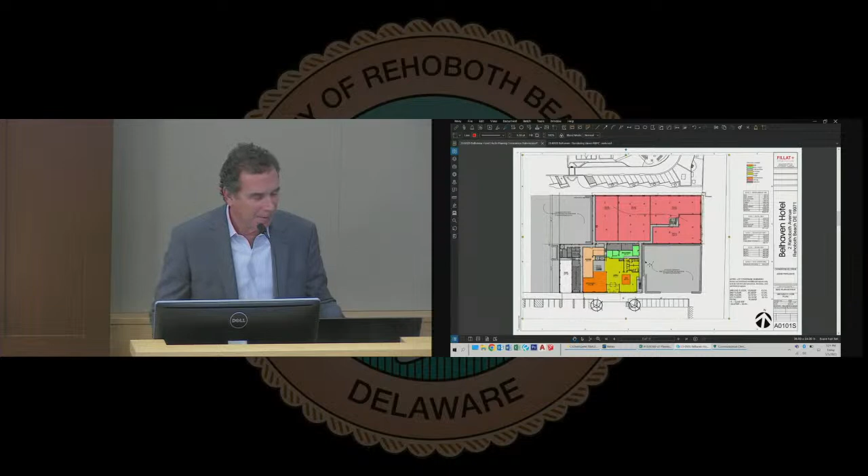I'm sorry, I can't hear you. I'm sorry. I pushed a button when I was presenting. This doesn't mean this right here. It's somehow it got pushed to the front of this drawing. Let me just see if I can fix this right now. Hopefully it'll work. No, that didn't work. Yeah, it's a graphic, it's nothing.

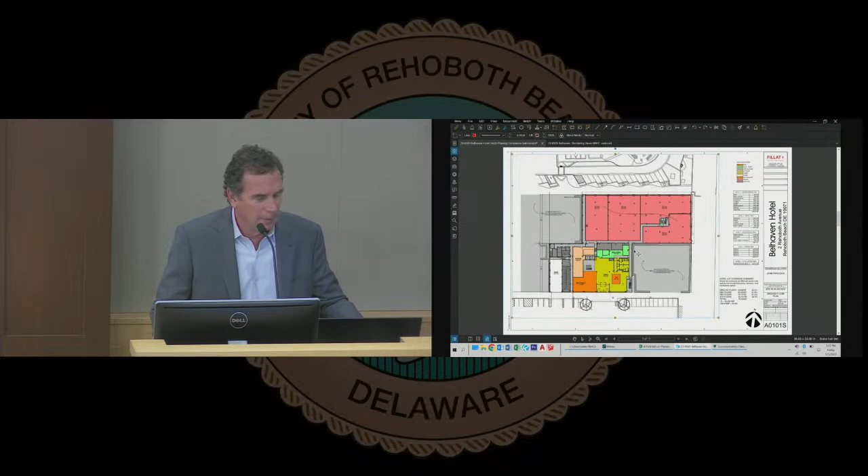That is absolutely, I don't know how it got there. Somewhere in the ether here, you're talking about this element right here. If you notice, it's attached to the whole plan. I don't know what that is, but it's nothing. I apologize. All right, so it basically butts up to my building.

There is no space to answer there. To your question, if I took everything else away, this is the service corridor, that's the property line, and your building is right there.

Okay, and then right behind where that trash area is, that is a window to my apartment, right there, where that trash area is. So you've got smell and you've got noise. It's a residence, and it's been a residence.

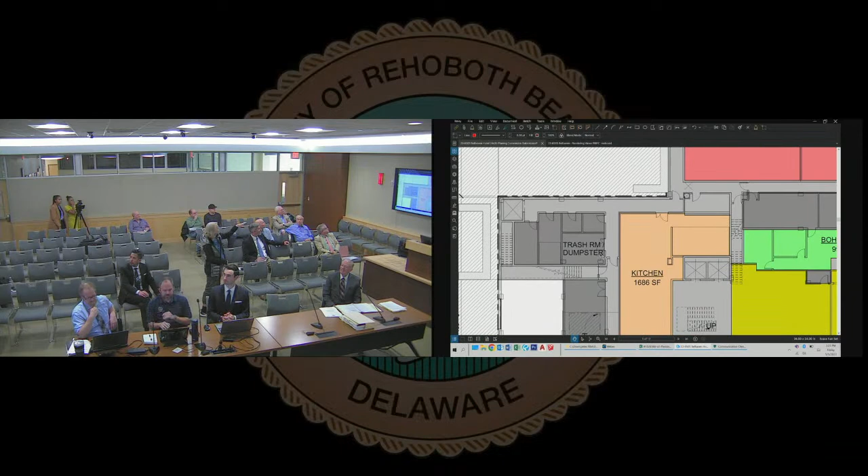Is that a solid wall right here? That's a solid wall there, I think those two dots there might even represent the opening. Well, you don't have it, but literally right behind that trash room is a window to the apartment, a double window to the apartment.

Do you have a backyard there? I'm sorry, is there a backyard there? I didn't hear. Do you have a backyard? A backyard? I'm sorry, I don't hear what you're saying. My hearing's really bad, I'm sorry. A backyard, do you have a backyard, a patio in the rear of your? No, it's just a window.

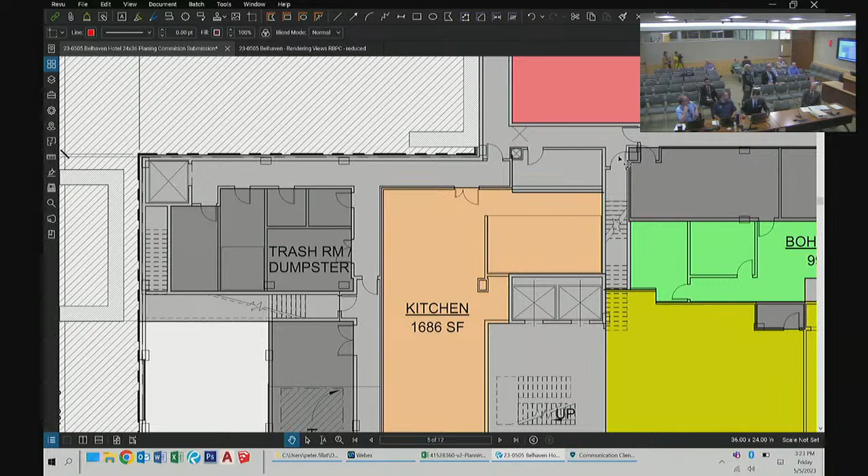But it's right there. I mean, the property line is 10 feet back from that? I think the testimony earlier, for the record, was that that area marked dumpster is going to be refrigerated. It's going to be enclosed. So people aren't going to be able to look down into it from a window in an adjoining building because it's going to be enclosed and kept cold, because as we all know it gets very hot in Rehoboth during the summer, and we don't want our trash smelling.

So when they pick those trash dumpsters up, they're going to be enclosed? It's inside the building. When they pick the trash dumpsters all the way up in the air, that's not going to be that's not in an enclosed building? It'll be at the loading dock where that happens, if at all, if that's how they choose to remove it.

Okay? I mean, your folks aren't going to be able to see it. There's stuff above this too, don't forget. So they're not going to be looking down at some dumpster from their window. They're just not. And the smell and the noise and then the loading? If it's refrigerated, it has to be enclosed, and the whole point of it being refrigerated is so nothing spoils and it won't smell. This is right next to the hotel lobby and restaurant.

And so, it's right under the window, the back window to my apartment. I understand.

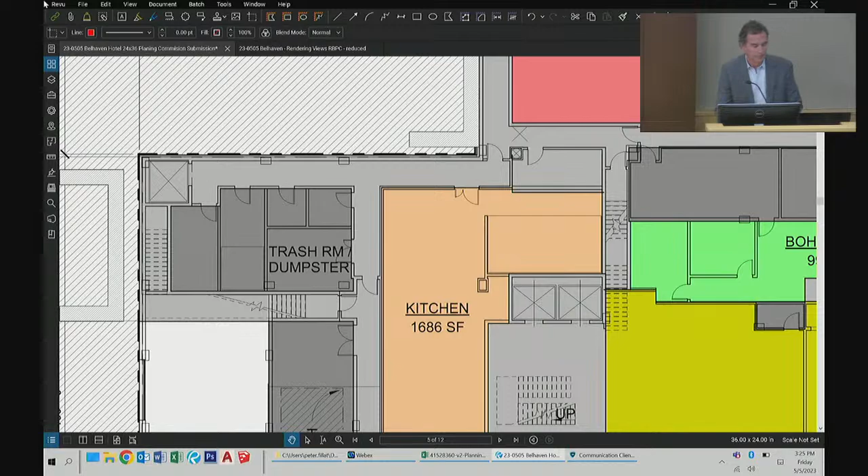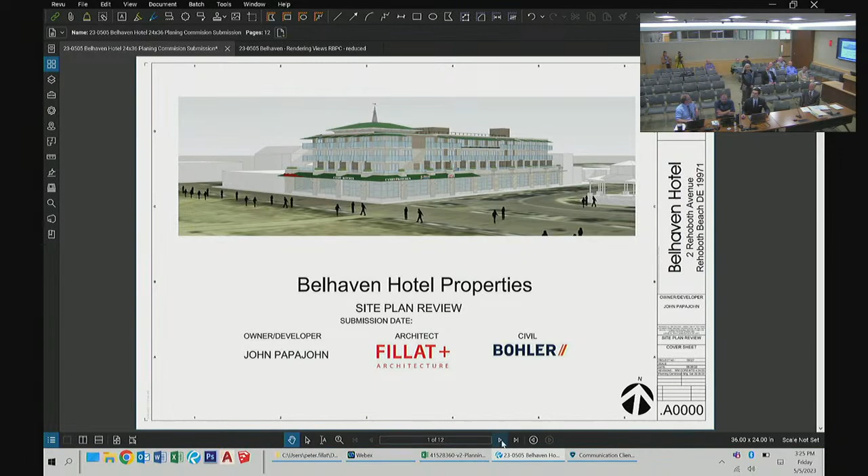It's not next to the window, and you won't be able to see it because it'll be enclosed. Just for the record, my building is 1,350 square feet of commercial. I get 2 to 3 deliveries a week, and each delivery takes between 30 and 45 minutes to unload into my store, and that's for 1,350 square feet.

Many times I come to work down Wilmington Avenue, it's a parking lot. So I get my deliveries in the front, because that's the only way I can get a delivery. I have an agreement with Sysco that they come at 4 in the morning. That doesn't always work that way because of truck issues. But I do that so I'm not taking up space, because my delivery takes half an hour with 2 guys delivering. That's just the way it is.

And that's an awfully long walk they're going to have with their trolleys. They pull up right out front, and to navigate around with all that weight, it takes time. So I'm concerned. I don't know how you're going to queue up the deliveries to avoid a parking lot on Wilmington Avenue with trucks waiting for other trucks to unload. That's an awful lot of space, and that's just the way it is. We're busy in the summer, and it's already bad down there.

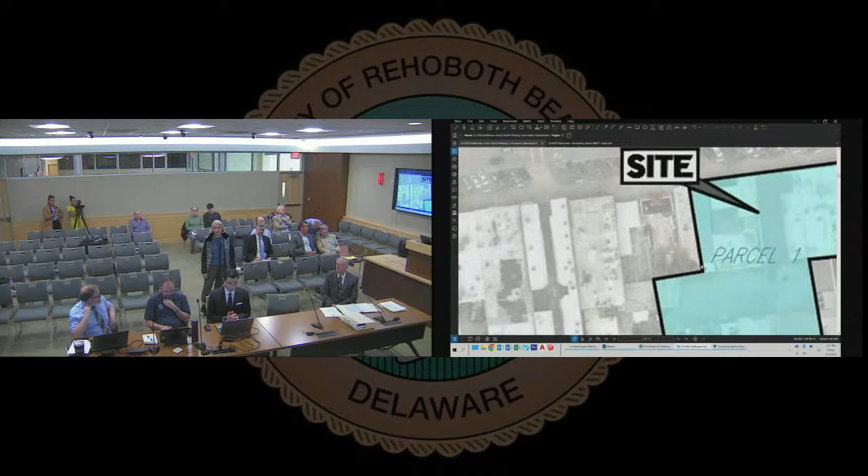Anyway, there are other things as well, but I'm not going to bring them up today because there's no time. Obviously Dr. Trejos's presentation is a grave concern, and now we're talking at another level underneath that. My building is perpendicular to the ocean. Am I just going to erode my foundations away? That's a worry I have to go to bed with. Thank you very much.

Anyone else? All right, the public comment period is closed. Mr. Forston or Mr. Dukes, or both.

If I give both of you a task, can you get it done twice as fast? Well, it'll take twice as long.

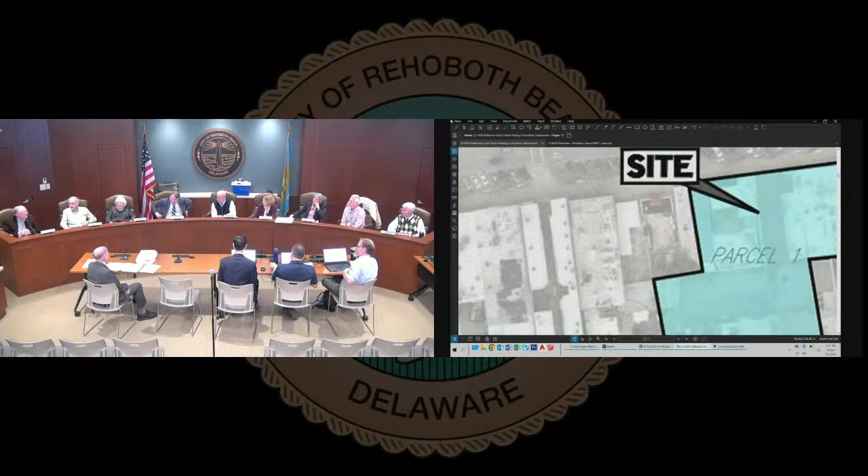According to the rules of the Planning Commission, all written materials to be considered need to be filed 30 days prior to the meeting at which they will be an agenda item. Just wanted to remind you of that. And I wanted to confirm again, since I've let the discussion go back and forth today, you do not intend to seek any variances for this plan. I think that's what we were told at the beginning. That's correct. And I just want to be sure that's correct. That's correct.

To follow up on that point, Mr. Chairman, our goal is a code compliant plan. We want to get this plan approved, we want to get it underway. We think it's going to be a boon for the city. You saw Peter showing some overhangs that have to be removed or shortened, and that's the plan we want to get approved.

Now, if after approving that code compliant plan you say to us, hey, we actually think it looks better with the longer overhangs, more artistically pleasing, we might then be encouraged to go to the Board of Adjustment and ask for that variance. But we don't need it, and we want to get a code compliant plan done. If during further discussions you say you'd really like it if we do this or that, and you understand we need a variance, we'll support it, approve our plan, and we'll go try to get the variance. As Peter said, it does look better with the longer overhangs. But we want to get a code compliant plan first and get underway. I don't want to have to go to the Board of Adjustment first to get something we really don't need.